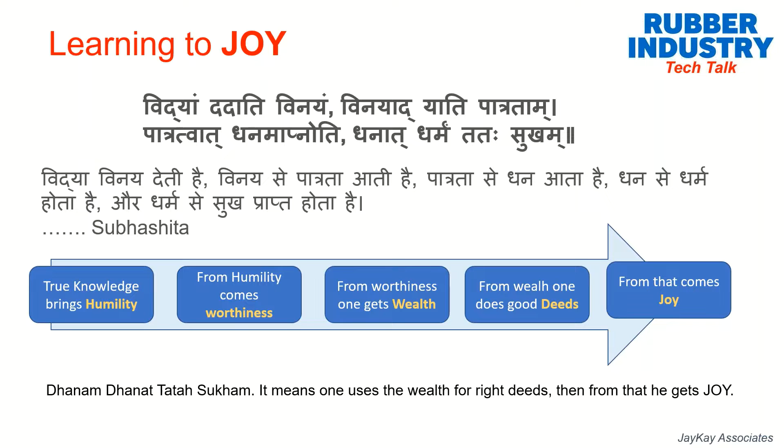So we now get into the process of understanding what a 4-roll calendar is. Basically, what is a 4-roll calendar? It is an equipment that is used in tire industries, typically for creating a uniform extruded sheet.

So the entire operation, which is summed up as a SIPOC, is supplier, input, process, output, and customer. The supplier is, in this case, we get a dip fabric coming from the raw material stores and mixed compound, final compound coming from the Banbury, and these become the two major inputs.

Process is coating the dip fabric on either side using the rubber compound to get a uniform thickness of the rubber and meet all the technical properties as specified. Output will be called a calendared fabric roll of a desired width, length, and specified gauge with balance of coat on either side equal. And the customer, this 4-roll calendar output of calendared fabric roll, goes into bias cutting for the next stage of operation.

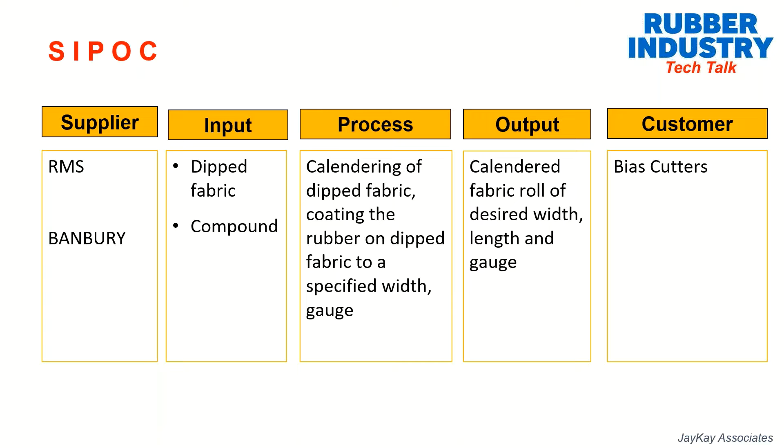Now, what is calendering? Like I said, calendar is an equipment which is used in tire industry for coating the dip fabric on both sides by rubber. Calendar is also used for creating a uniform rubber sheet of even thickness. Calendars are also available as a profile calendar, where we can keep some kind of a die and take different extruded dimensions of our requirement. So it's a process by which compound rubber is used to create a desired profile either on a plain rubber sheet, or topping of dip fabric by coating on either side, or even the steel wire, which forms an integral part of reinforcement in a tire.

Basically, we have different types of calendering machine.

There is a 2-roll and a 3-roll calendar, primarily used for cushioning purposes to create a rubber sheet of thinner gauges. There is a fabric calendar, used for coating rubber onto nylon, steel cord, or whatever fabric on either side. You can even have a 3-roll calendar for coating rubber on nylon fabric, but it will be done in 2 passes.

There are modern calendars available, and they are of different types: inverted L type, L type, S type, and Z type. These indicate the positioning of the main stack of rollers and how it appears. We will see this in pictorial form in the slides to come. And there is a steel calendar.

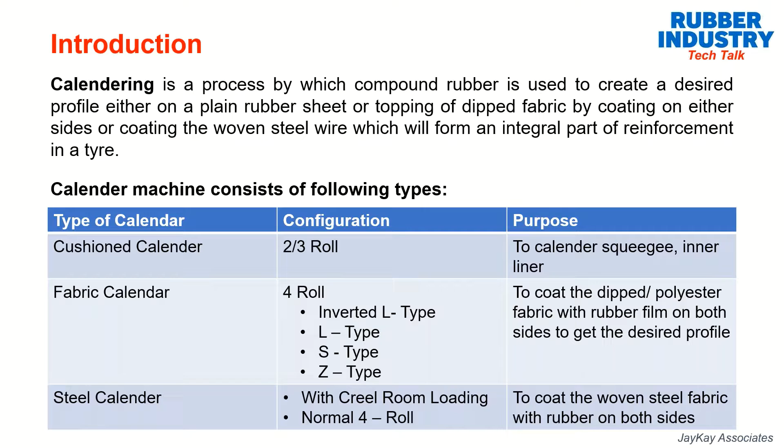There are 2 processes. One is creel room loading, where spools are loaded in a creel, wires are drawn and taken through a reed, then passed through the extruder and calendering machine to get a coating. The other is where a completely woven fabric of steel is available, and you take it like any other nylon or rayon fabric and pass it through the calendar to get coated.

Types of calendering: fabric calendering. A 4-roll calendar is used for calendering dip fabric. The fabric calendars produce an upper and lower rubber sheet with a layer of fabric in between, and the impregnation of rubber into the interstices of the fabric forms a good homogeneous, well blended calendering. This coating has to be even on either side of the fabric, since this gives insulation to the reinforcement going into the tire, strengthening the tire ply rating required.

Squeegee and inner liner calendering is done in a 3-roll or 2-roll calendar. It is basically a sheet rubber of uniform thickness all around a specified width, varying from around 0.20mm or 0.25mm up to about 3mm thickness. This is done using steam as a heating medium to create a uniform profile.

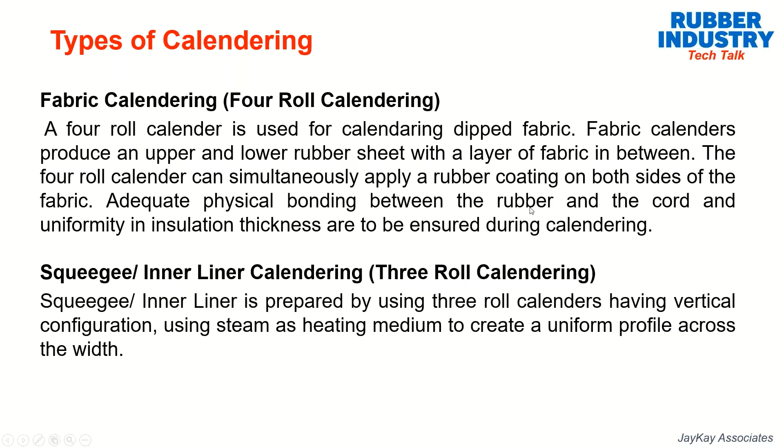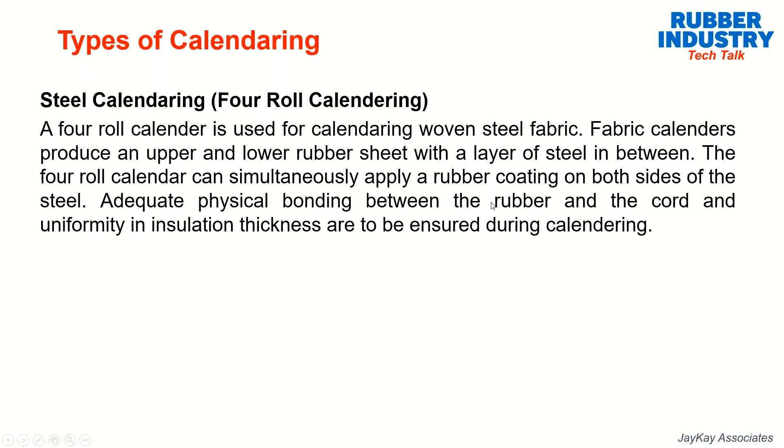There is steel calendering, which uses a 4-roll calendar for calendering woven steel fabric. Pre-woven steel fabric can be passed through the calendar like rayon or nylon and coated on either side. In the case where creel room loading is available, designated steel wires in spools are loaded into the creel, drawn with uniform tension, then passed through the calendering, and coated on either side of the steel fabric with rubber to get a uniform gauge.

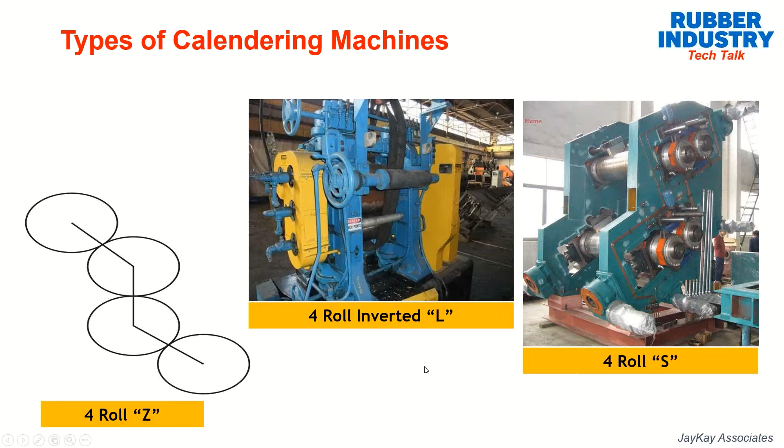Here, this is the inverted L, where normally when you write L, like we write it, so this is that type. You have one roll here, one roll here, and then another two rolls following by the sides. Then there is an S roll, in the shape of an S, so that's called S type calendaring. But basically the purpose of all remains the same.

So what is a calendaring unit? A rubber calendar in basic form consists of two or more hardened, accurately machined metal rolls rotating in bearing journal boxes, which are set in rugged iron frames. These are all completely high tensile steel.

What is important here is that the preparation of the roll itself is highly technical, and that plays a vital role in the longevity of the roll in running. At least one roll is equipped with screw downs to control thickness. In fact, all four rolls in modern calendars are equipped with screw down motors, so each roll can individually be lifted up and down, facilitating very uniform and exact gauge control.

Adjacent pairs of rolls rotating in opposite directions form a nip, where the material being processed is squeezed into sheets or laminated to form a desired product. A nip is nothing but the confluence of two rolls rotating in opposite directions. The gap in between the two allows setting the desired gauge by passing compound through that.

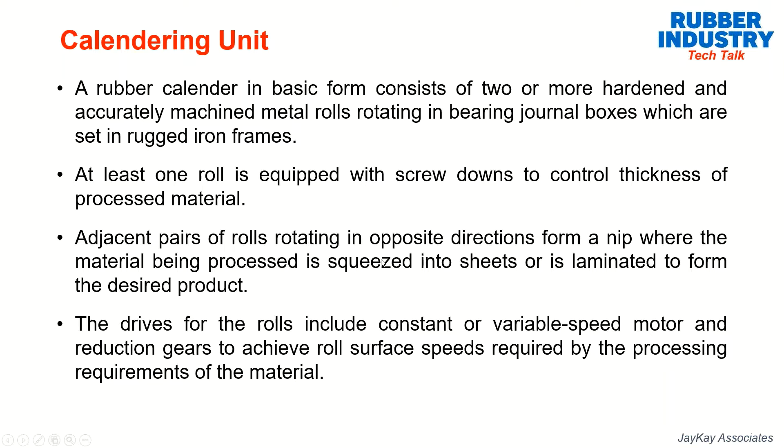The drives for the rolls include constant or variable speed motors and reduction gears to achieve roll surface speeds required by the processing requirements of the material. The speed can be adjusted for individual rolls, in such a way to get a uniform calendared output in the fabric, to achieve proper gauge and coating of the rubber.

Generally roll number 3 is called the master drive, which controls the entire speed and operation of the calendar. So when roll number 3 controls the entire speed, all other rolls can be made to work with reference to roll number 3.

Generally the gap between roll number 2 and 3 is called the fabric nip, through which the fabric passes between roll number 2 and 3. So the speed of roll number 2 and roll number 3 always remains the same. This is to facilitate that when the fabric is moving, it does not have any undue problem of rubber getting accumulated behind and causing calendaring issues.

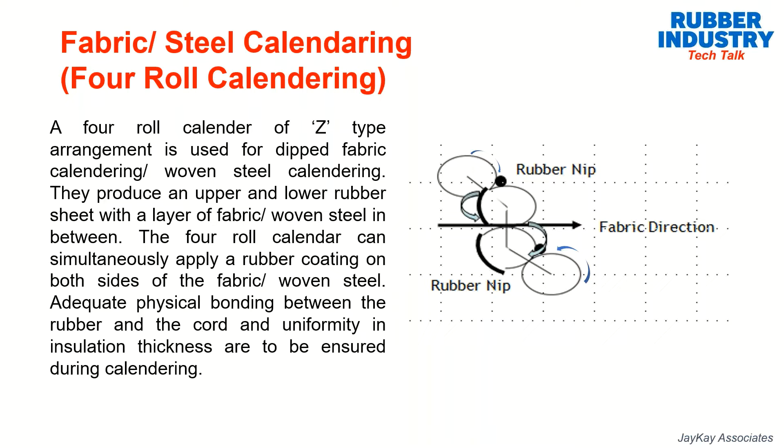Now there are different functionalities of all four rolls. A modern high-tech calendar has something called roll camber or roll crowning. What is roll camber or roll crowning?

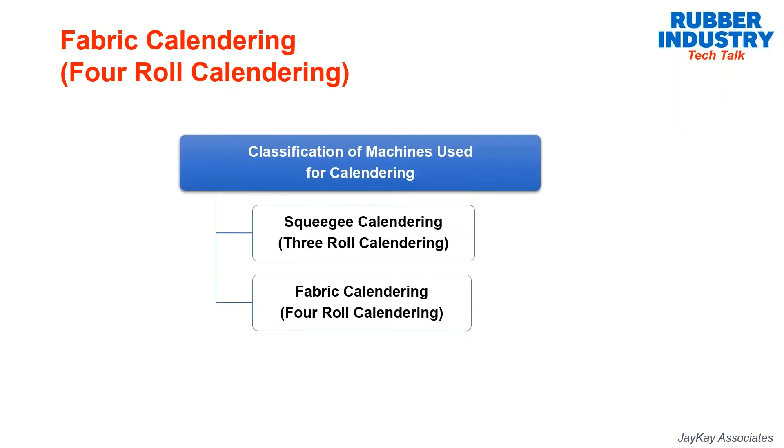Roll camber is a process where on the roll there is a profiling given at the center, tapering towards the end. This facilitates that as the roll wears out in the long run, the gauges can still be made good, and every time we cannot take the roll out for recambering or grinding. So in order to prolong the life of the calendar roll, it is generally advisable, when buying a new calendar, to have the crowning at around 6 thou, which is around 0.006 inches across the diameter.

This roll cambering facility is available on roll number 1 and roll number 4. Basically roll number 2 and 3 are plain rolls because fabric is passing in between the two rolls, so we don't want any kind of profiling there — it has to be a smooth, plain roll.

In order to compensate for the wear out that takes place on roll number 1 and 4 over a period of time, we have a facility called roll bending, which is given to roll number 2 and 3. So as the camber or crowning keeps reducing over a period of usage, you can increase the bending proportionately on roll number 2 and 3 to ensure that the overall thickness of the calendared item, whether rubber or fabric, remains the same throughout.

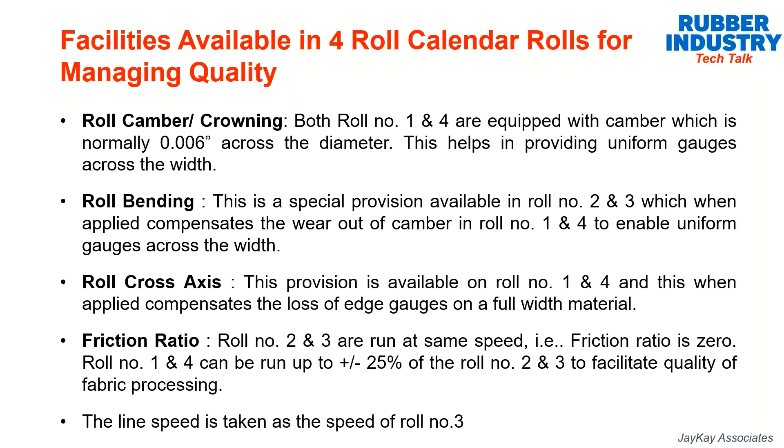Then there is a feeding of stock that should come to the calendar. It should be in a continuous flow, and it should be in a regulated and controlled flow. So there are many types of feeding available. One is you can have one more calendar feeding uniform strip into the nip of these calendars.

You have mills which are used for cracking the compound, warming the compound, and finally ensuring that the desired quality of the compound is fed into the calendar at a desired width and gauge. Then there is a third one which is called—

there is an extruder available. So from the extruder, you chop this entire rubber compound and convert it into pigs. Pigs are the small rubber pieces, and then it flows onto a mill, and from there you actually feed it to the four-roll calendar. So this is called the pork chop extruder.

Feeding can be done through mills, which are 84-inch mills or 60-inch mills, depending upon the capacity and the speed at which the calendar runs, so that the feeding capacity is adequately there. It can also be fed through a pork chop extruder, which means the rubber sheet is directly loaded into the extruder, then cut into small pigs, and the pigs are loaded into the mill. From there, it is sheeted out and sent. There can also be an extruder feeding the sheet directly.

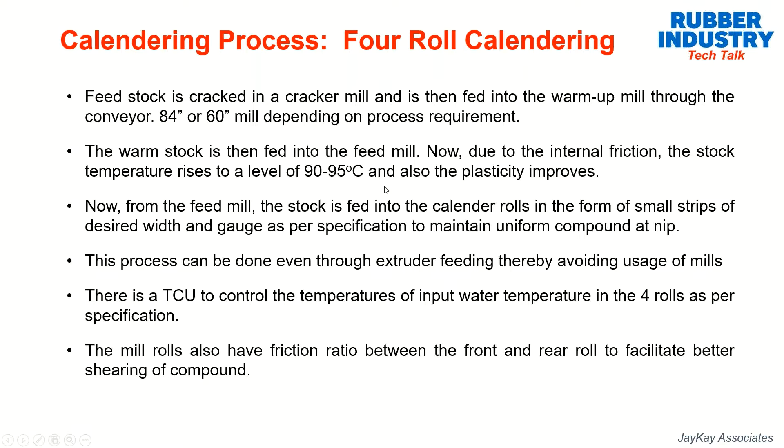Dip fabric is loaded at the let-off side on a dual let-off to facilitate continuous operation. The purpose of dual let-off is to ensure that operation runs continuously without stoppage.

Why should we not have stoppage? Because whenever the calendar stops, even for a small time like one minute, there will be a lot of scrap generated because of operational concerns. Any stoppage will also induce a variation in the gauge, the pressure variation at the nip. So it is ideal and very essential to ensure that the calendar does not stop and runs continuously.

To facilitate this, we have a dual let-off, so that when one let-off is getting over, there is a compensator which takes care of loading fabric into the calendar by the time the second let-off fabric is made available to feed to the calendar.

The pneumatically operated braking system is set to get uniform tension. Tension is very, very important everywhere. The entire tire industry operates on a 3T formula: time, tension, and temperature.

Tension is important everywhere, and when it is nylon, rayon, or polyester fabric, it is all the more important, because any extra tension that gets into a stretch mode will completely change the properties of the fabric. So it is very essential to ensure uniform tension as specified.

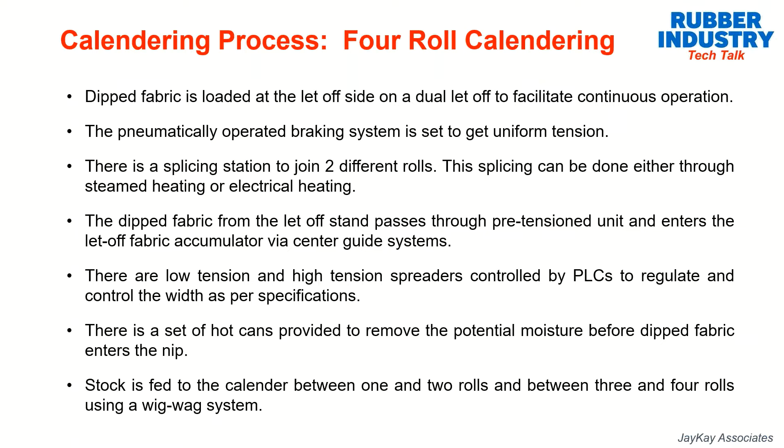The rubber will be coated on the fabric which is passing between roll number 2 and 3. This nip is called the fabric nip, and roll number 2 and roll number 3 run at the same speed, allowing the fabric to pass comfortably without any friction. The rubber coating formed behind roll number 2 and behind roll number 3 gets impregnated with the fabric and then comes out as a calendered fabric.

After cooling of the calendered fabric by passing over cooling drums, it passes through an accumulator. Like we have hot cans for ensuring removal of potential moisture, we also have a set of cooling drums. As the calendar comes out of the nip, it will be somewhere around 95 to 100 degree temperature. So when the fabric is coming out, it has to be brought down to room temperature by the time it gets into the liner and wound up.

How do we bring it to room temperature? As it passes in the ambience, there will be influence of the ambience which will be reducing the temperature. However, for a controlled temperature to be uniformly available, we pass the calendered fabric through a set of cooling drums, maintained at a water temperature of around 25 degrees so that it doesn't sweat on the roll.

Once the temperature is lesser than 25, it has a tendency to become chill water, and chill water tends to cause sweating on the cooling drums. When that sweating happens, the water may contaminate the fabric and moisture will again be picked up. So we don't want a situation where you use chill water.

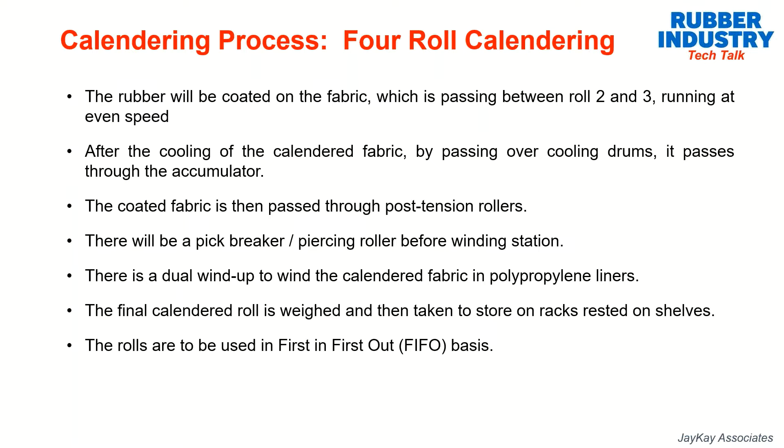When you have the first system where roll storage naturally facilitates first in first out, then it happens smoothly. If you keep it on any kind of rail platform instead, then the first in first out has to be managed properly, either using a Kanban process or any man-controlled process.

Then a sample is taken from every calendered roll, and sent to the laboratory for various tests like H adhesion and tensile properties, as well as a bigger strip of fabric for doing the peel adhesion, which shows how good the compression has been between the fabric when it is getting coated on either side. The laboratory then gives approval, and based on that approval, the fabric is sent to subsequent downstream processing.

The operator has to ensure conformity to the calendar fabric gauge, width, and skim balance. The width maintenance has to be absolutely on the dot. Higher width may be beneficial to the company, but it is not good for the tire.

But lower width is absolutely detrimental, because when the width goes lower than the specification, there is a tendency of the cord to get crowded, either at the edges, selvages, or even through the body. This increases the number of ends per inch in an inch, which we call EPI. When EPI goes up, the insulation around the cord actually comes down.

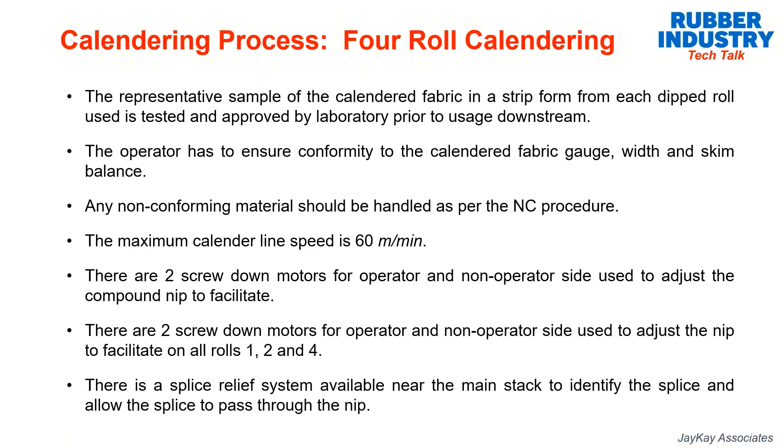And this is not present in all calendars. Only sophisticated modern day four-roll calendars are provided with this system.

So whenever the fabric has to be joined at the let-off, first the accumulator is taken to the open position, so that when it is in full open position and the let-off is stopped, the accumulator starts feeding the calendar roll and comes down slowly. There is a safety limit at which it is locked, so beyond that position, the calendar stops.

So you have to ensure that the time it takes for the accumulator to go from the top position to the rest position is enough for the entire splicing operation to be completed and controlled. This is a very key element, which is why it's important to keep the splicing time at the minimum while ensuring a proper, good splice.

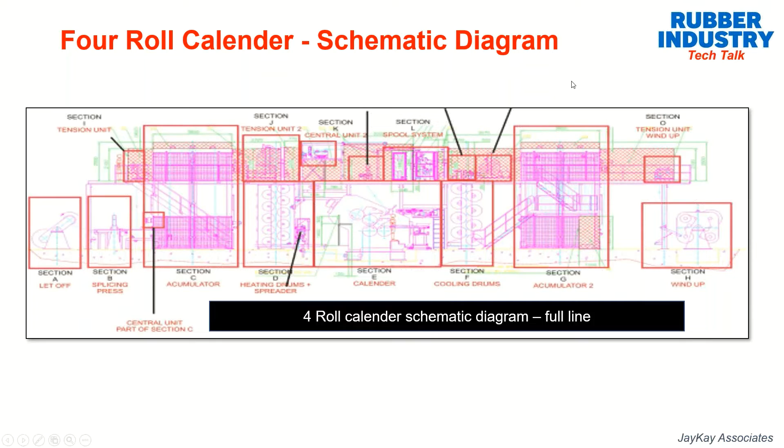So the same thing is given in a process flow method. There is a dual let-off stand. From there it goes to the splicing, then to the let-off pull roll, then to the let-off center guide system.

Then the accumulator. The center guide system is always present before the entry to the accumulator and exit of the accumulator. So post let-off there is a center guide, and pre let-off there is a center guide. This ensures that the fabric is centered to the main core of the machine. Then this is the E plus L center guide, which is generally maintained by E plus L.

And there is a low tension spreader which ensures that the width is regained and retained at different intervals as the line is passing through, so that the fabric doesn't get crowded. Then it goes to a set of hot cans so that it removes all the moisture from the fabric, and it goes to the pull roll unit.

Then it goes to the pre-tension stand and high tension spreader. After that it holds the fabric so that there is no possibility of slackness in the fabric. There is a 3-finger spreader which controls the edge spreading of the fabric, so that the EPI at the edges are kept properly.

Then it goes into the 4-roll calendar, between roll number 2 and 3. Then there's a post tension stand, then a pull roll stand, then a cooling drum, then a pre-wind up center guide, then an accumulator, post wind center guide, then a poker and a pricker. This is what we call a pick breaker or poking unit. From there it goes to the wind up pull roll unit. Then there is a load cell which determines the measurement, and then it is taken onto a dual wind up.

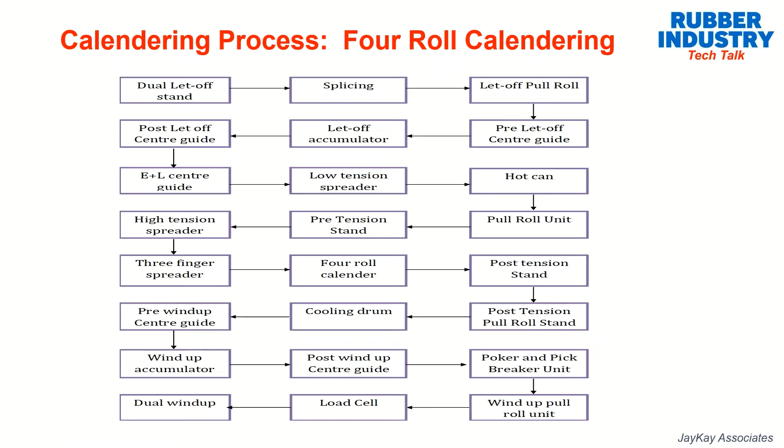Now, there are typically certain things when you operate a calendar. Fabric is a very expensive material, one of the highest raw material costs in making a tire. So any scrap generated out of this is going to cause a very big problem to the operation and to the cost of the tire also, because the manufacturing cost will go up as the scraps keep moving up.

So you have to maintain a balance between the cost, the scrap usage, or cost of poor quality. We want to maintain it at a certain level. Then we have to ensure that the fabric is not going into scrap mode. So what are all the reasons why a fabric will go to scrap? One is if my gauge is not okay. If the gauge is more or less beyond the acceptance level, then the fabric will have to be scrapped.

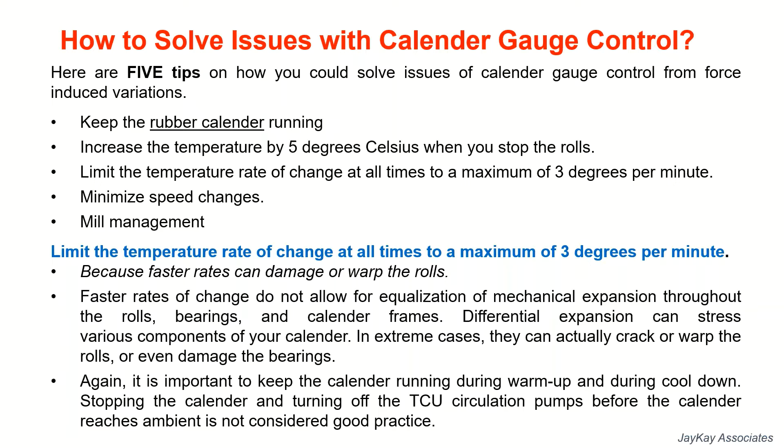Keep the rubber calendar running, because stoppages cause your calendar rolls to become egg-shaped, which introduces significant gauge variation. Stoppages also cause the pressure in the calendar nip to drop, causing a drop in the calendar thickness gauge.

When you stop the rubber calendar, heat loss from the roll is not uniform around the surface. Heat loss along the face of the rolls near the adjacent roll is minimal, while heat loss in the open areas is higher. Any temperature difference like this can lead to variation in the gauge.

It is recommended to adopt the following steps to minimize thermal runout. Keep the calendar running during warm up. If not done, significant thermal runout can be introduced. You need to remember that the calendar nip gap between adjacent rolls will be reduced as the rolls enlarge with increasing temperature. So a good practice is to open your rubber calendar at least 2.54 mm before starting to increase the roll temperature above ambient.

These are all certain thumb rule guidance. Individual companies may have their own setup operations, but what is important to understand is don't increase the temperature straight away, ramping up from low level to high level in one shot. Similarly, don't reduce from high level to low level in one shot. It has to be done gradually. This ensures the temperature transition happens in a very smooth way, and the calendar should always be kept running, because continuous running ensures the temperature is uniformly spread out.

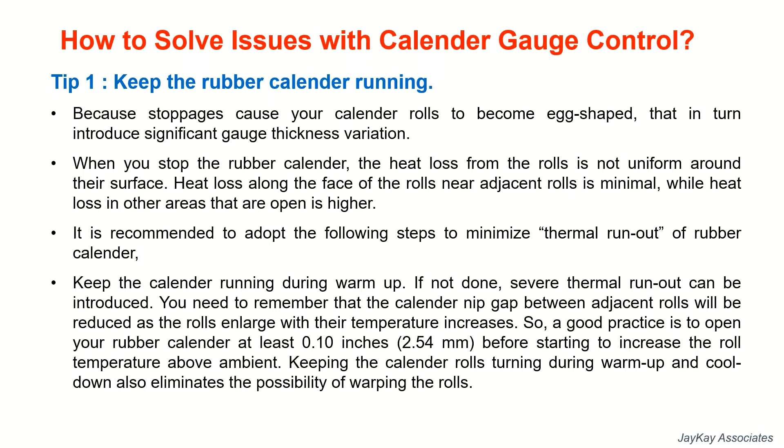Minimize the calendar stops. When you stop the calendar for a long time, remove the rubber from the bank. This is a good operating practice for the rubber compound as well, because there is heat around the calendar and the nip, and when the calendar is stopped with rubber in the nip, if you allow the rubber to stay there, it may get scorched at the nip, since we keep an opening of less than 1 millimeter or 1.5 millimeter.

So the film will be very thin, and it's likely to get scorched, heated up, and burnt at the nip. That burnt rubber, when you restart the calendar, if it remains in the nip, this one small burnt or scorched piece of rubber is good enough to completely spoil the entire volume of compound available, and it will lead to lumpy calendering.

So it is very essential whenever we operate the calendar to first ensure minimal number of stoppages, or zero stoppages, and even slowdowns have to be very minimal. But comparing a stoppage and a slowdown, a slowdown is better, because at least continuous operation is going on.

The only thing is, whenever the calendar is slowed down, ensure to operate the nip profiling in such a way that the overall uniformity of the gauge is maintained across the width. This is very important. Otherwise, as the speed reduces, gauge variation happens.

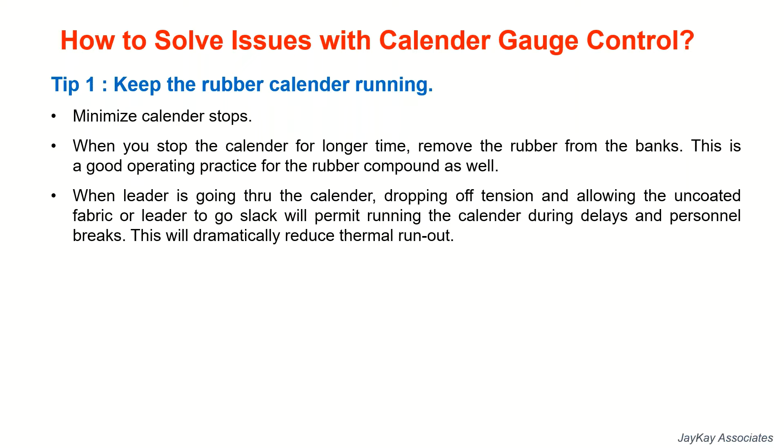So increase the temperature by 5 degrees when you stop the rolls. You need to realize the TCU temperature of your rubber calendar controls the temperature of water exiting the rolls, and not the roll surface temperature. This is an important distinction. We maintain the TCU temperature to a desired level by the influence of the water coming into it. So it is the temperature of the water inside the calendar roll which creates that temperature profile on the surface. We are actually controlling the water and not the rolls. So it is very important that we don't increase the temperature beyond a particular desired level.

Let us look at two scenarios. When the calendar is not processing the rubber, that is during warm up and when the calendar is stopped, the roll surface is losing heat to the atmosphere. Here the TCU is actively heating the water loop. In this condition, the roll surface temperature is below the water temperature. When the calendar is running and processing the rubber, heat is being generated and the TCU is cooling the water loop. In this condition, the roll surface temperature is above the water temperature. These two distinct phenomena create a differential impact on the running and on the product.

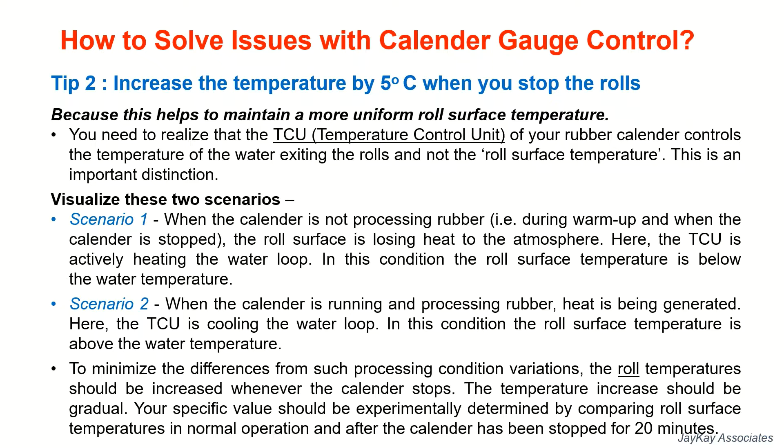To minimize the differences from such processing conditions and variations, the roll temperature should be increased whenever the calendar stops. The temperature increase should be gradual. The specific value should be experimentally determined by comparing the roll surface temperatures in normal operation after the calendar has been stopped for 20 minutes. When I say 20 minutes, 30 minutes, it is basically referring to the fact that whenever we are stopping the calendar, ensure the temperature ramping is given proportionately in a gradual way in order to gain the required set temperature at the calendar roll and ensure smooth calendaring.

You should limit the temperature increase to not more than 3 degrees per minute, because faster rates can damage or warp the rolls. Faster rates of change do not allow for equalization of mechanical expansion throughout the roll bearings and calendar frames. Most calendars are hydraulic operations, so they become easily susceptible to these kinds of issues. Differential expansion can stress various components of a calendar, and in extreme cases they can actually crack, like we discussed earlier.

Again, it is important to keep the calendar running during warm up and during cooling down. Stopping the calendar and turning off the TCU circulation pumps before the calendar reaches ambient is not considered good practice. So as we start the calendar, start the TCU first, take it a little above ambient temperature, maybe by 10 degrees. Once the temperature attains that, increase it by a further 10 degrees. So the startup operation takes a certain amount of time.

Similarly, for the wind up operation, when the calendaring is finished, don't directly shut the TCU off. Gradually decrease the temperature and create a gradual cooling to the rolls.

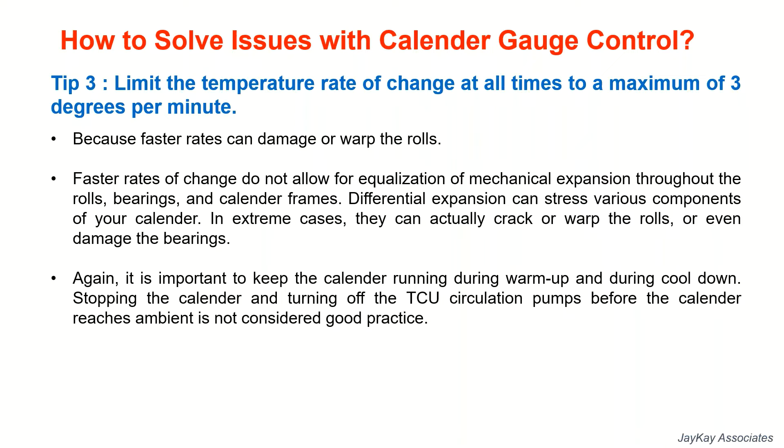Minimize speed changes, because changes in your calender speed result in gum wall thickness variation, since there is pressure in the nip which varies whenever there is a speed change happening. When the calender is running, forces are generated that try to separate the rolls, and these separating forces are proportional to the calender speed, although the relationship is not linear.

Practically, what we have seen is, if the calendar is running at 50 meters per minute and you suddenly reduce it to 30 meters, the gauge drops. If you don't adjust the nip immediately, and you know the reduced speed is going to run for 2-3 minutes, then you have to immediately adjust the nip to bring up the requested gauge. Similarly, after that 2-3 minutes, when you increase it from 30 back to 50, the gauge will immediately jump up.

So in order to avoid that, as you increase the speed, immediately you have to work on the nip profiling to control the nip in such a way that you get a uniform gauge at all times. The hardness of your rubber stock and bank temperature determines the magnitude of separating forces. The thickness of the gum wall being calendered also affects the separating force. Thinner gum walls generate higher separating forces.

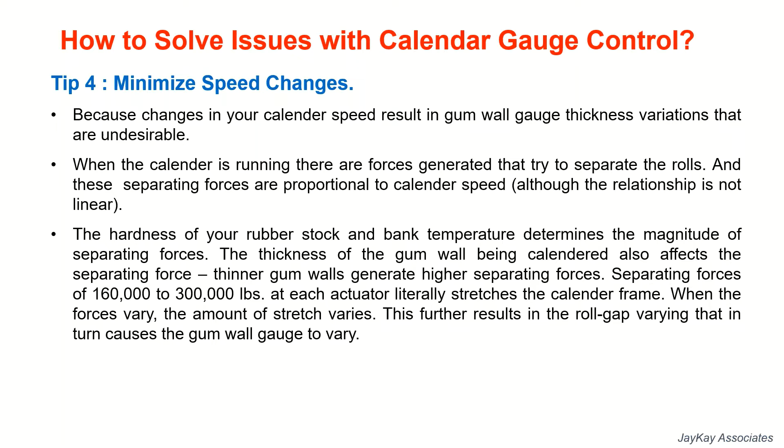Separating forces of somewhere between 1.6 to 3 lakh pounds at each actuator literally stretches the calender frame. When the forces vary, the amount of stretch varies. This results in roll gap varying. This is one of the main reasons when the tendency of the loaded rubber into the nip can exert this kind of force and stretch the rolls. Having a profiling in the roll helps to mitigate this stretch and create a uniform flat thickness on the fabric.

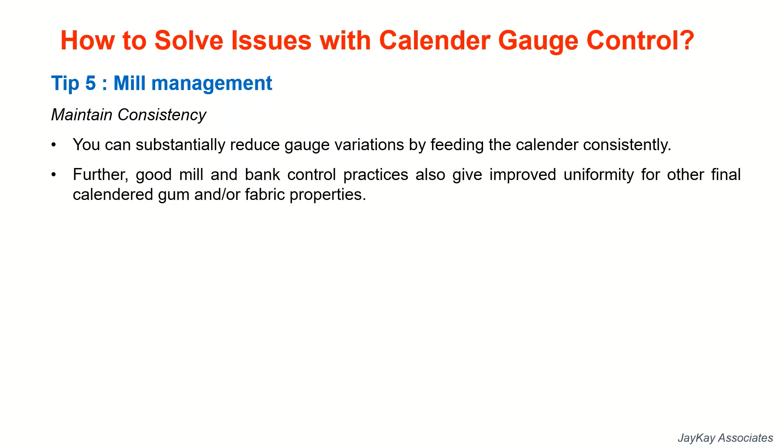Mill management: maintain consistency, preferably use variable speed motor, so that as the calendar speed reduces, the mill speed also reduces, thereby the feed is maintained at a constant uniform rate. If variable frequency VFD cannot be managed in the calendar due to cost constraints and other things, then ensure that the strip width and the strip gauge is maintained, and with the change of speed happening in the calendar roll, you have to moderate the feed going from the mill to the calendar. So mill management becomes very, very critical in this case.

There are certain mechanically induced variations also we see. Mechanically induced calender variation relates directly to your rubber calender's mechanical condition. It's basically a maintenance issue.

And here also we have 5 direct things: grind profile of calender. The roll crowning, as the calendar is used more and more, wear of the crown happens, and this wear of crown is compensated by roll bending wherever the roll bending facility is there. If there is no roll bending, and only wear of crown is happening continuously, then over a period of time, at a certain acceptable level, when it crosses that, you have to remove, stop and get an in situ roll grinding done, or remove the roll and change the roll if the grinding possibility is not possible.

Eccentricity of the calender roll run out at ambient temperature has to be checked frequently on a defined frequency. Condition of calender roll bearings has to be monitored very frequently. These all should come as a part of the preventive maintenance checks, so that proactive checks are done to ensure minimal losses on the running operation.

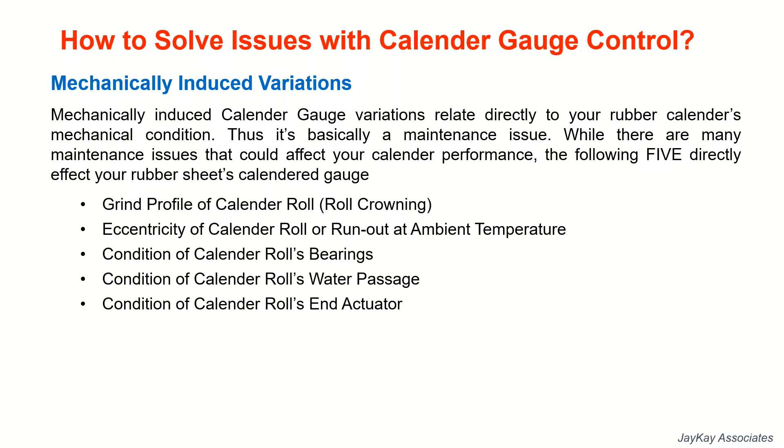Condition of calender roll water passage, and because of the water quality, the pH level, or the kind of minerals present in the water, there can be scaling happening inside the calendar roll. So we need to do some kind of descaling operation by passing some acid, which we call acid cleaning. This can be planned once in 6 months or once in 3 months, depending upon the water quality and condition, ensuring that the rolls are cleaned inside and flushed out, so that the temperature impact is not caused onto the roll, and thereby a smooth calendering happens at all times.

So when we talk about roll crowning, as the calendar runs and wears out, there is a wearing out of the camber or crown which happens. In case of a calendar equipped with roll bending, you can actually compensate the wear of the crown proportionately by adding the roll bending to the process. And if it is not there, then you have to do the grinding at some point in time.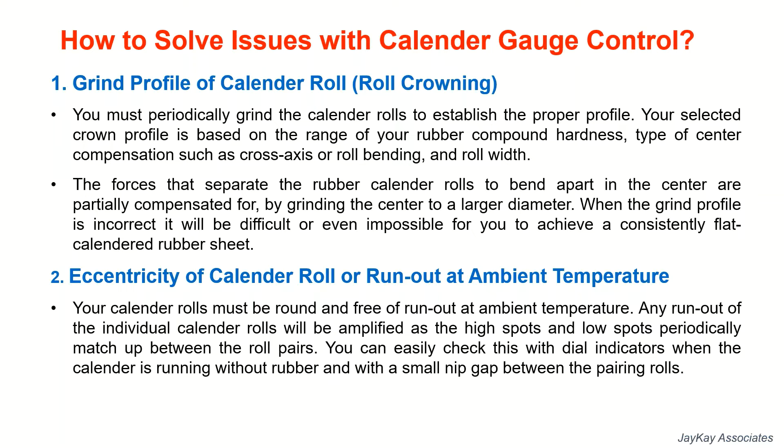Then eccentricity of the roll runout. Your calendar rolls must be round and free of runout at ambient temperature. Any runout of the individual calendar rolls will be amplified at the high spots and low spots periodically matching between the roll pairs. You can easily check this with dial indicators when the calendar is running—you allow the roll to run at a slow speed and then keep the dial and check. That will tell you whether there is any abnormality seen in the roll profiling because of this runout.

So the bearings have to be checked. In case of a hydraulic system, there are oil level controls for lubricating the bearings. In case of a sophisticated calendar, self-lubricating bearings are also there. Despite all these controls, if the roll bearings go bad, it can impact the calendar performance. So we need to have our own internal controls, checking these periodically using a preventive maintenance process, and ensuring that this is maintained and controlled.

Water passage, like I said, becomes very critical for cooling as well as for circulation in case of calendar rolls. One of the chances is scaling, so we have to ensure that we descale the process and the rolls periodically, so that we don't get into a situation of water supply not being adequate.

Most modern calendars have drilled rolls. So what's the difference between a cored roll and a drilled roll? Drilled rolls will have the water passage going peripherally around the surface of the roll, whereas a cored roll will have the water going through the center of the bore. There is a roll with a bore in the center, and water passes through that and gets circulated. Whereas with a drilled roll, it goes along the periphery of the roll surface.

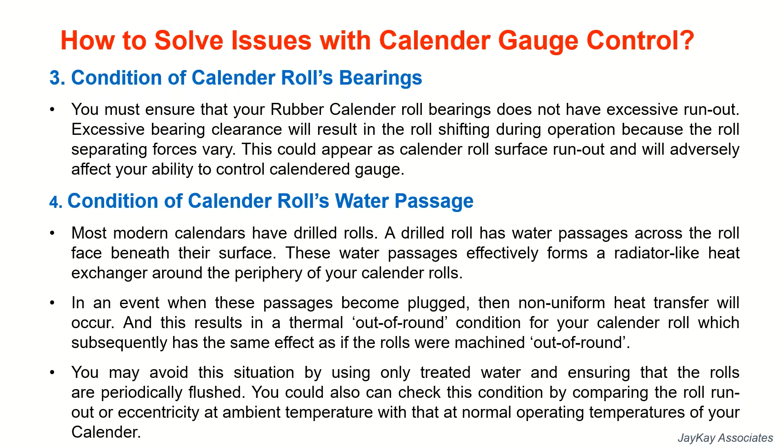A drilled roll has water passage across the roll face beneath the surface. These water passages effectively form a radiator-like heat exchanger around the periphery of your calendar rolls. When these passages become plugged, non-uniform heat transfer occurs, resulting in a thermal out-of-round condition. This is why periodic, well-defined descaling or acid cleaning treatment has to be done to the rolls, to prevent damage and extend their life.

Calendar roll end actuators come in different variants - manual or motor driven hydraulic nip gap adjustment, electric screw actuators are the most common type of calendar roll positioning system. The screw and nut operate under very high loads, and thus you will observe they experience significant wear even with proper lubrication, as this actuator backlash develops.

So any kind of sensing equipment or sensing devices - it can be actuators, it can be in the roll gauging process also. There is a kind of actuator which is provided, working on a magnetic influx of a field, which gets converted into electrical impulses for control on the panel.

All these things will have to be periodically tested, because any wear and tear or fluctuation happening to any of these actuators and controls can directly result in gauge variations and can result in machine failure also. When the backlash increases, the response to small changes or corrections deteriorates. Further, with increased backlash, the number of corrections required would increase, which in turn causes additional wear.

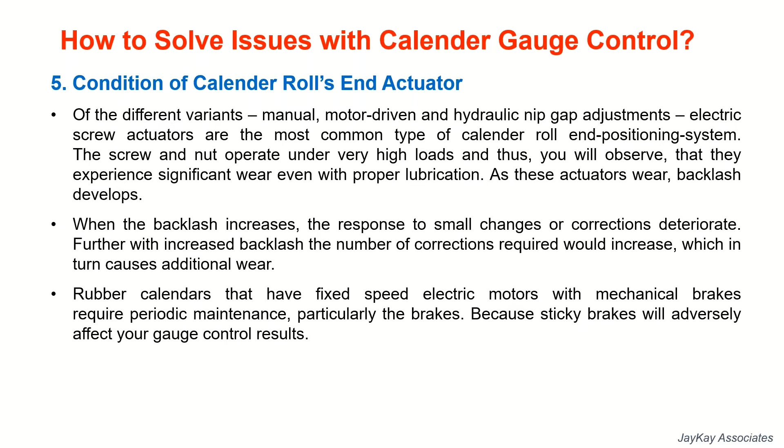Rubber calendars that have fixed speed electric motors with mechanical brakes require periodic maintenance, particularly the brakes, because sticky brakes will adversely affect your gauge control results. We also have further facilitations where gauge control systems are given - automatic gauge control systems, even automatic weight control systems. So more and more sophistication is being added to the machinery. All the controls that ensure the smoothness of this will have to be periodically followed and maintained as a preventive maintenance process.

So there are certain tests performed for calendar fabric. But before we go to this, there is one significant thing called calendar guides. These guides are provided to regulate the compound within a specified width across the face of the calendar, so that the compound doesn't slip out and get crushed under the guide between the two rolls.

Mostly when the guides wear out, the compound has a tendency to pass through the worn out portion of the guide and gets crushed, and with the temperature in the roll and the film being very thin, this crushing happens and turns into lumpiness. Once one piece of lump gets into the nip, it causes the full calendering operation to go bad.

So the guide is very, very important. The hardness of the guide should be lesser than the roll, because the wearing member should always be the guide and not the roll. It should not be the reverse. There are certain tests performed, which is H adhesion.

The die position is like the English letter H, where the cord is placed in between two rubber layers. When it is put on the jaw of a tensile tester, with one fixed end and one moving end, the force required to separate and pull out the cord from the matrix of the rubber is judged as the H-adhesion force.

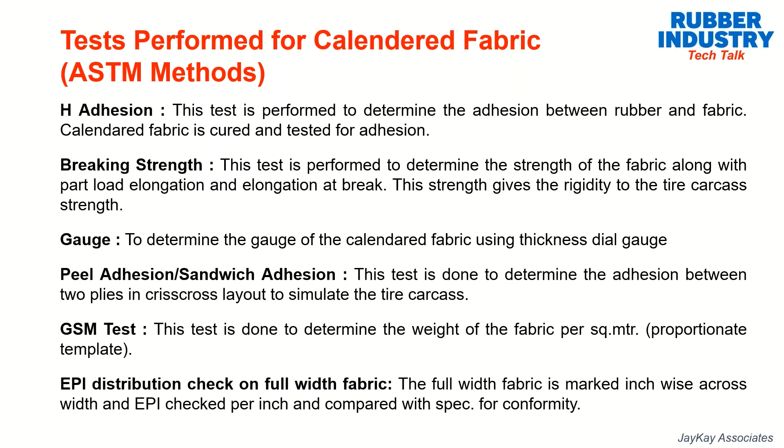General precautions: calibration of all instruments used as part of control in the respective control plan. This is very important. All equipment in the calendering process has to be under calibration.

Usage of all components like compound and fabric should be on FIFO and aging basis, so a Kanban method is preferred here. No in-process component shall be kept on the floor. No material, be it compound, liner, or fabric, should touch the ground, and it should always be on its regular specified MHE, material handling equipment.

Non-conforming material, if any, shall be kept at a designated area. You should clearly demarcate the OK material and the non-OK material.

SPC charts, where applicable, should be updated at a defined frequency. This is to get an online statistical process control of the process that we are doing.

Display of SOP, work instructions, process standards, control plan, PFMEA, internal customer complaints, external customer complaints, and daily work management trend graphs should be available in the workplace. This is to facilitate a feedback loop to operating personnel about our own process, as well as our process impacting the customer internally and externally. Then filled startup setup checklist, CLIT checklist.

Cleaning, lubrication, tightening, and inspection checklists should be available in the department. This is part of basic operation control.

Only lab-approved material, where applicable, should be used in production. A compound cannot be used if there is no lab approval for it. These are certain hygiene parameters which are to be very critically followed.

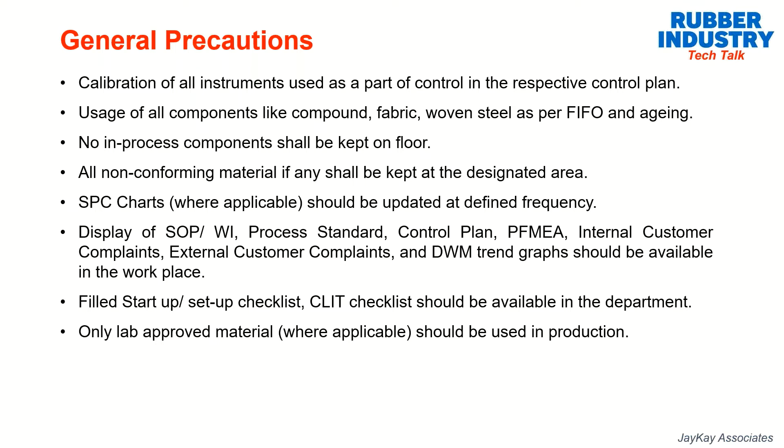Defects and troubleshooting: loose coating or rubber peeling. This is when the coating of rubber is very loose onto the fabric. This happens when the nip pressure is very low, which can easily occur with speed variations in the calendar. The effects are bare cords while building, green tire rejections, and ply separations. Because the coating of rubber is loose, there won't be proper holding of rubber-to-rubber bonding, and it can disintegrate from the fabric and cause separations.

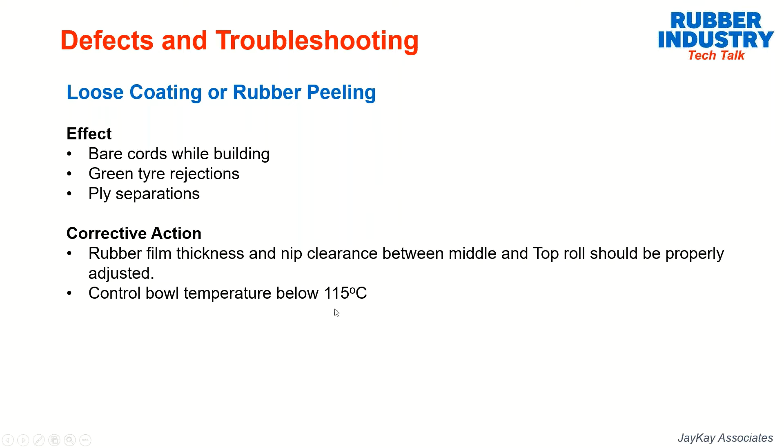Corrective action: rubber film thickness and nip clearance between the middle and top roll should be properly adjusted. Also control the bowl temperature, the calendar temperature, to less than 115 degrees.

Stock or fabric style substitution: basically no substitution of fabric or stock should be done, because everything is intended for a definite purpose and a definite application. Any change or variation can directly impact the performance of the tire in the field, and it can in turn impact the market as well as our brand image, so it should not be done.

It can lead to lower casing strength if the EPI is low or the wrong fabric is used, or the denier is wrong. If a higher EPI fabric is used, it may cause low adhesion because the insulation around the cord may not be sufficient. A different denier than specified can cause casing failures.

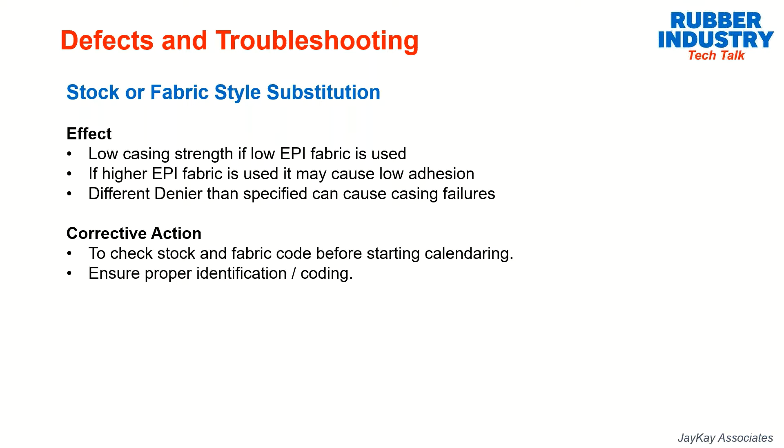Corrective action: check the stock and fabric code before calendaring, and ensure that tagging is properly done and identification is available.

Then cured lumps and bare fabric. A bare fabric is one where there is no coating on the fabric, so you see the fabric in its original condition, and that is to be removed in the process and not used, because if there is no rubber, there is no chance of adhesion for rubber to rubber holding together in the process. So this will again lead to ply separation and contamination.

Second, if the bank is not maintained and is running out, some of the rubber goes under the guides, and if the guide is not proper and it gets churned between the roll and the guide, this can come back into the rubber bank, and this can immediately cause a spread of lump, leading to cured lumps and lumpy calendaring.

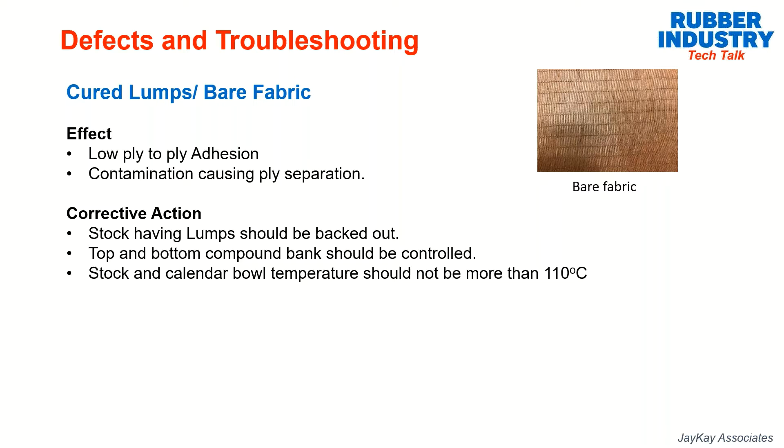So the action is to avoid having stock. Having lumps should be backed out. Top and bottom compound bank should be controlled and uniform, and the guide should be maintained properly.

Width variations are a direct impact of the spreaders that we have all across: low tension spreader, high tension spreader, and the effect of those things. When the spreaders are not in proper working condition, or center guide systems are not properly working, they have to be checked and corrected to regulate the fabric flowing at the center of the machine, as well as ensure the low tension and high tension spreader guides are working to ensure the distribution of the cords.

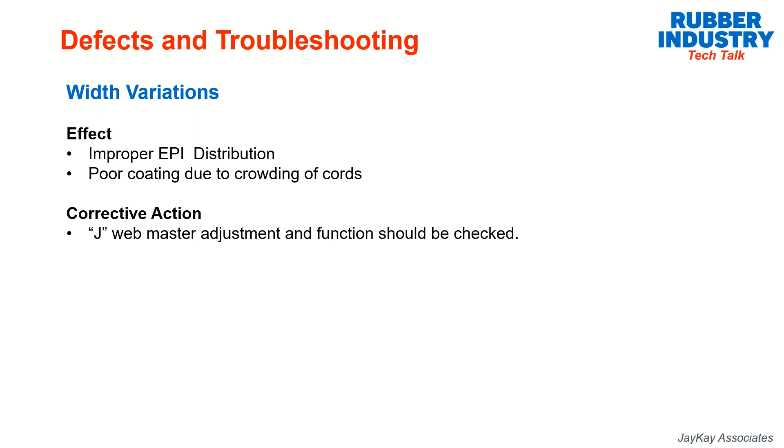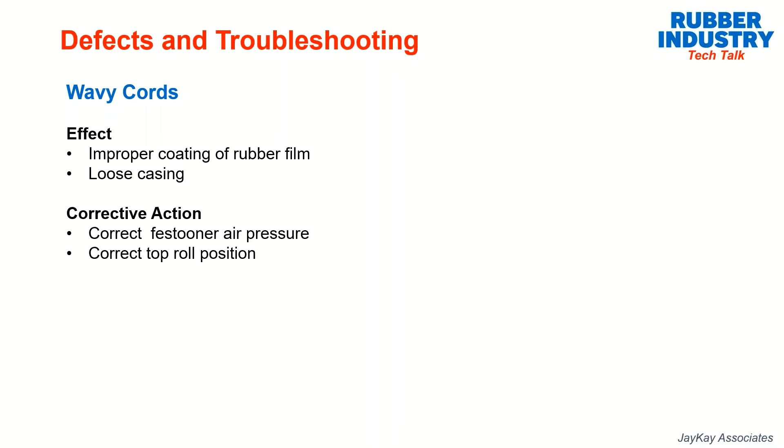Wavy cords: the effect is improper coating of rubber film and loose casing. Corrective action is festooner air pressure and correct top roll position. Wavy cord can also come because of the tensioning process. As I said, everywhere the calendar is a very critical operation as far as tension is concerned. It should not lead to stretch, at the same time it should not lead to slackness. It should be taut—that is the kind of tension we should maintain.

Cold calendering: the effect is high gauges, poor adhesion, low tack, and surface appearance also clearly seen. The corrective action is that the rubber has to be warmed up properly so that proper temperature is maintained and rubber feed comes into the calendar nip.

So feed hot stock to the calendar, and heat the calendar bowl by passing steam if necessary. This is not required when you have a TCU, because the TCU controls the temperature of the calendar bowl. In case there is no TCU control, you have to pass steam to ensure this cold calendering disappears. When there is cold stock, it's better to back it out, get it rewarmed, and then put it back, controlling the bank.

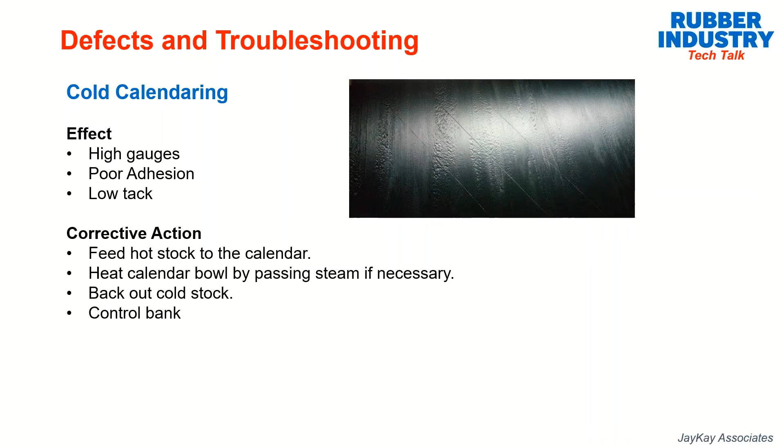Gauge variations: this is a cross section showing the fiber nylon, and on both top and bottom sides you have the rubber coating. The coating of rubber on the top and bottom should be the same, in order to ensure that we keep the feeding to the stock of the top nip and bottom nip controlled. So what are the effects?

If the gauge variations are poor, this affects insulation of the ply and causes tire weight variations, and can also lead to immediate failures in the market because of cord and cord chafing and rubbing against each other.

Corrective action is that the calendar stack or bowl temperature should be good, and the feeding stock temperature should be warmed up and adequately maintained. Water circulation has to be in place. More importantly, speed variation should not be there in the calendar, and stoppages should not occur.

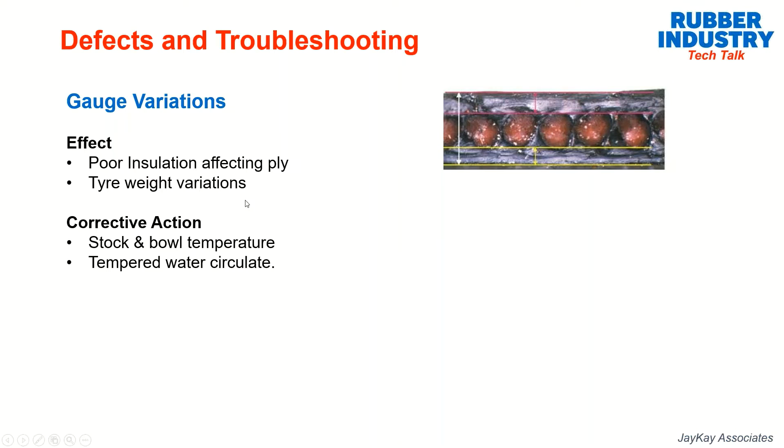Crushed fabric is the opposite of rubber peeling, and whatever actions we take for rubber peeling, if done in excess, will form crushed fabric. When I am running the calendar, if I see a crush, it means the fabric is getting pinched at the nip, so I have to lift the top roll, roll number 2, to ensure the pinching is not taking place. But when the lifting of roll number 2 is higher than required, it will lead to rubber peeling. So an action taken on rubber peeling beyond a point will lead to crush, and action taken on crushed fabric beyond a point will lead to rubber peeling. They are complementary to each other.

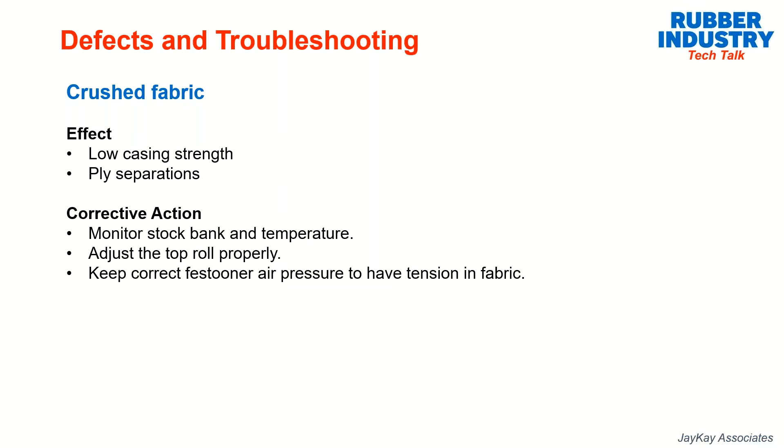This leads to low casing strength and ply separation. So monitor the stock bank, adjust the top roll properly, and keep correct festooner air pressure to maintain tension in the fabric. Any speed variation matters too: when running at a certain speed and suddenly dropping the speed, it will lead to crush. When running at a certain speed and suddenly increasing the speed without adjusting the nip roll, it will lead to rubber peeling.

Before we end the session, I'll quickly run through the summary of the learnings.

A 4-roll calender is equipment used in calendering operations in the tire industry for coating fabric, whether nylon, rubber, rayon, polyester, or even steel, with rubber on either side, with uniform gauge and weight. A 4-roll configuration is of S type, Z type, or inverted L type, depending upon the shape of the rolls present in the equipment. The 4-roll has 4 rolls which can be independently controlled.

Roll number 1 and 4 have cross-axis and crowning facility, while roll number 2 and 3 are plain rolls with no profiling, and they have the roll bending facility. The purpose of roll bending is that when the roll crowning wears out over a period of usage, roll bending compensates for the wear on the crown, and can prolong and sustain the operation for some more time. Whenever, beyond a period, gauge variation is seen because the profiling on the camber has gone down, it is time to take the roll for grinding and regrind it.

There is a splice relief control available. The splice relief ensures that sensing of the splice joint passing the nip is seen and doesn't cause any damage. It is a 3T control: time, temperature, and pressure. You need to have the splicing time under control, the temperature under control, and the pressure also under control, so that the splice joint doesn't snap up during the run.